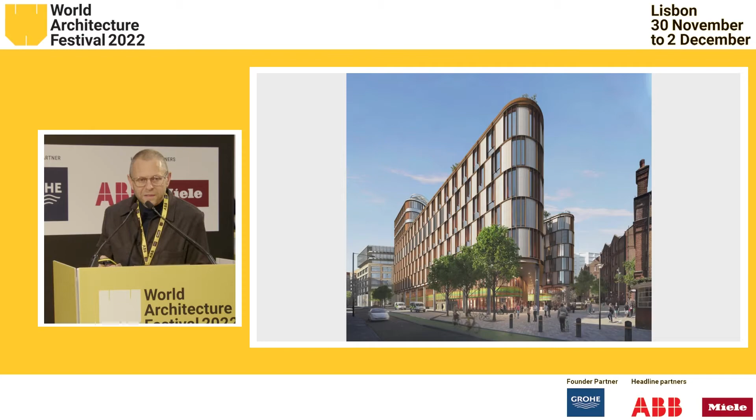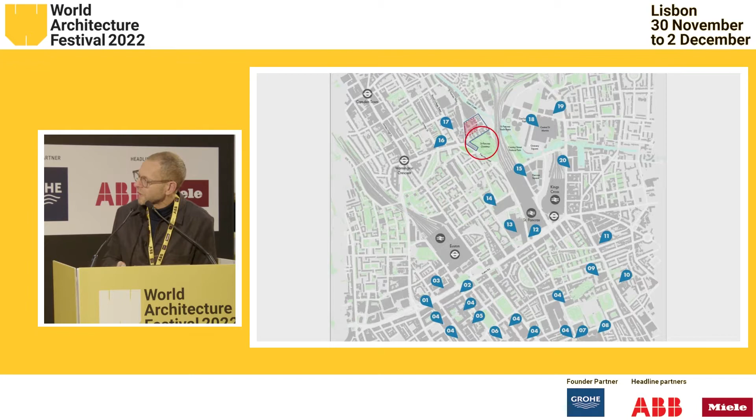The site is in St Pancras, located within the King's Cross Knowledge Quarter, which will enable it to participate with other world-leading institutions, such as the Crick Institute, the Wellcome Trust, and Central St Martin's School of Art. It will also be better connected to the rest of the UK and also to the rest of the world.

The site is set within the historic St Pancras Hospital, still with its original Victorian buildings and completely walled off from its surroundings. And to the south is St Pancras Gardens, a lush place where once stood the 4th century church of St Pancras for 1,000 years, and is currently the resting place of the famous architect Sir John Soane. And you can see by the railways and the canals that it has a rich industrial past.

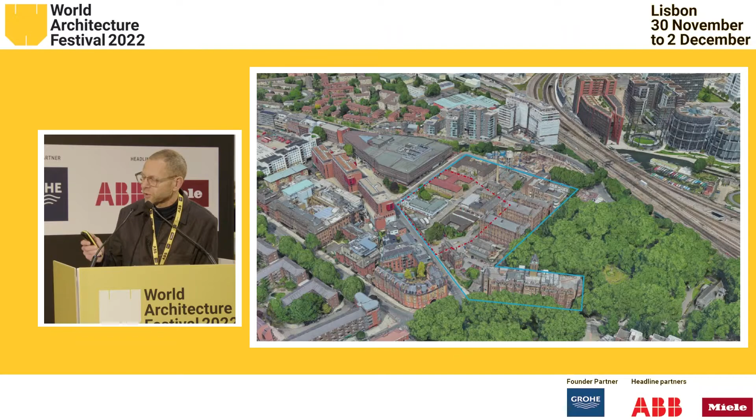Yet the area is changing rapidly, with new developments emerging to the north and to the east.

So what kind of typology could respond to the challenging brief and the rich site? The competition threw up many different ideas, such as the finger, the block, and the campus. Our idea was to create an atrium, inviting in the public realm, which flows through the building and creates maximum connections at the upper levels.

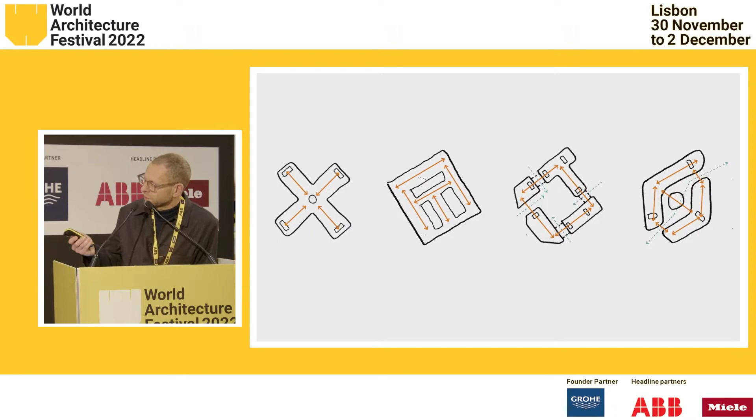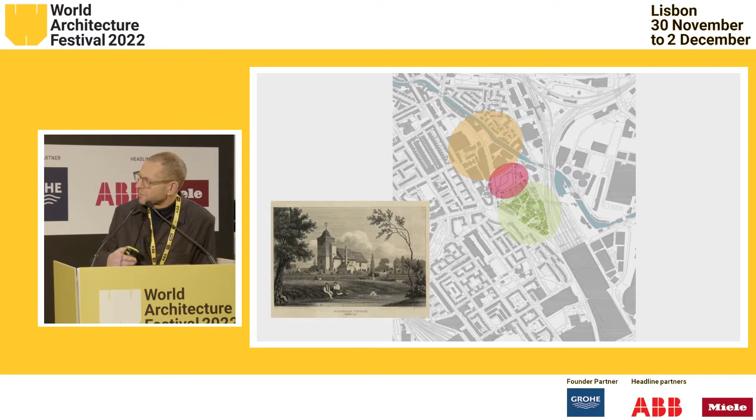Three design drivers inform the design. The first is to create a magnetic new place. Oriel will take its place in the evolving heritage of the site. So drawing on the history whilst looking to the future, it aims to become an urban catalyst and through its architecture, literally create an identifiable and unique neighborhood.

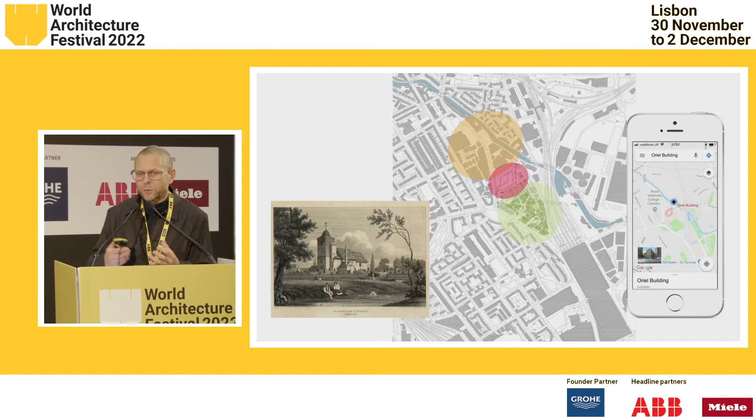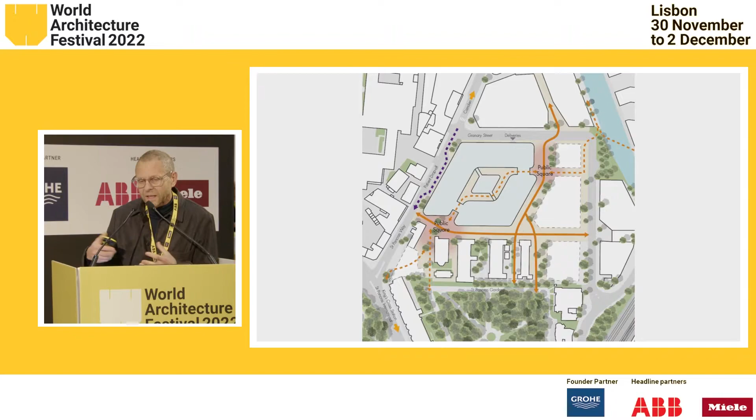So to this end, our urban strategy opens up the site, creating a permeable, accessible, and car-free campus and making better connections through and into the neighborhood. And one of these connections goes through Oriel itself. And two public squares connect people coming from all directions, from the south, from King's Cross, and from the north, and collects people and forms civic settings for our building.

And the public realm flows through the building and connects to the surrounding streets and spaces. And this is activated by retail units and cafes at each entrance, and by conference and education facilities and other public and patient-facing services on the ground and lower ground floor.

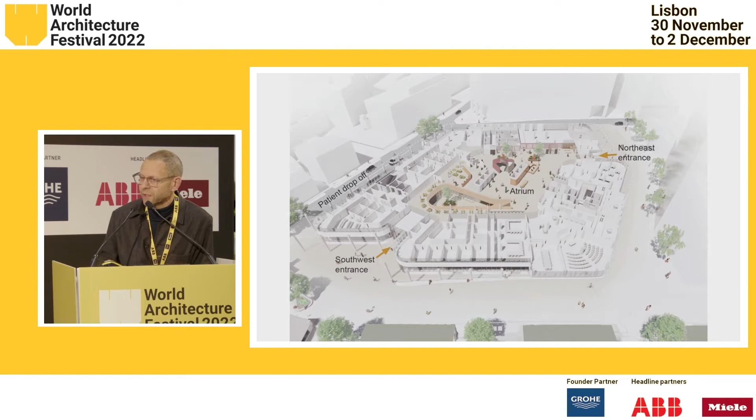And at the heart of the building is this atrium, a generous public space which welcomes everybody. It is here people can come, they can meet, they can hang out, and it also acts as a foyer to the rest of the building.

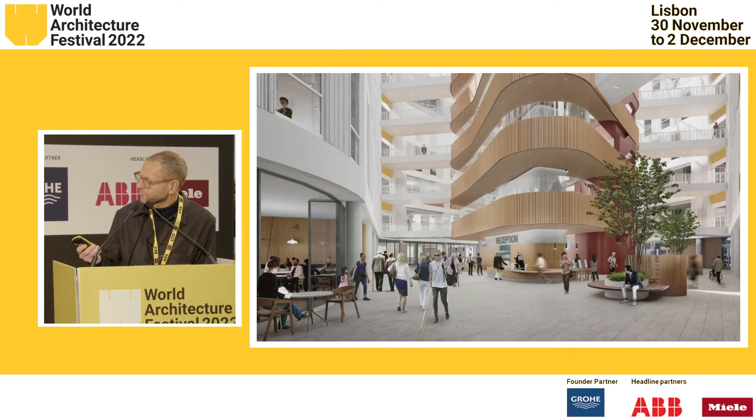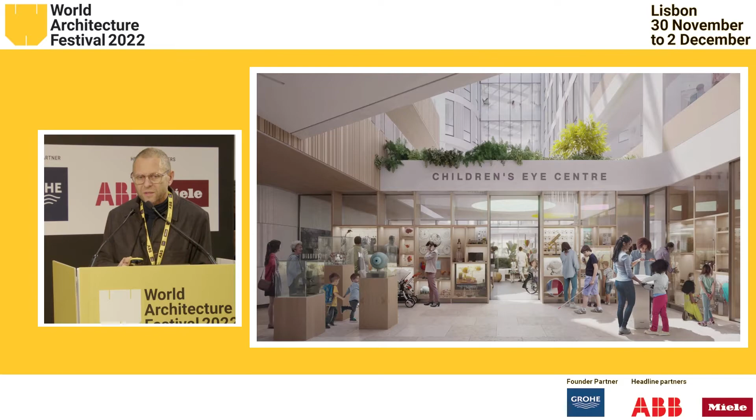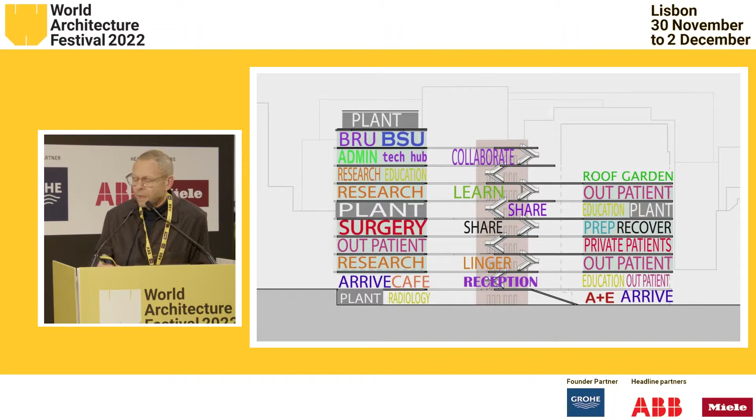The second design driver is that of integration and collaboration. Oriel is all about breaking down silos and creating and promoting cross-disciplinary collaboration. And in particular, it's about creating collaboration between patients and researchers and students and also the clinicians.

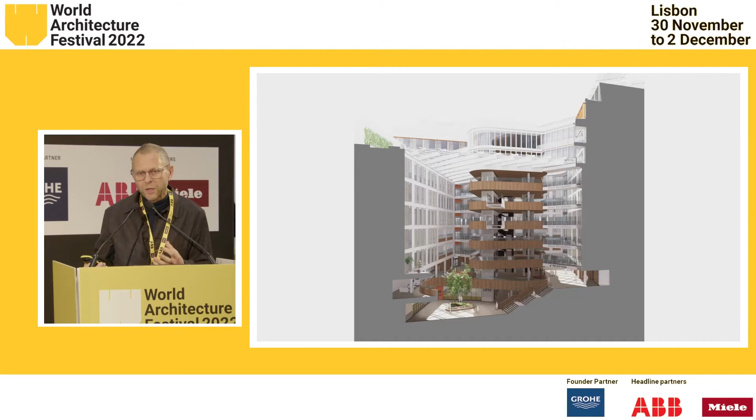And so a structure that we call the Oriel, which is almost like an embodiment of the idea of translational medicine, rises up through the atrium and collects all of the main vertical and horizontal circulation. And we've co-located waiting areas, staff touchdown space, and informal meeting points in order to foster those kind of water cooler moments and serendipitous chance encounters.

The third idea is that of the adaptive building in line with a circular economy. Oriel's brief is highly innovative, embracing the inevitability of change. So the shell and core acts as a flexible rig.

There's a series of generic floor plates that can accommodate a wide range of different uses, from A&E to translational medicine and outpatients, from theatres to labs, and from education to admin and Cat 3 labs on the roof. This flexibility will also allow departments to flex as research priorities and clinical needs change over time.

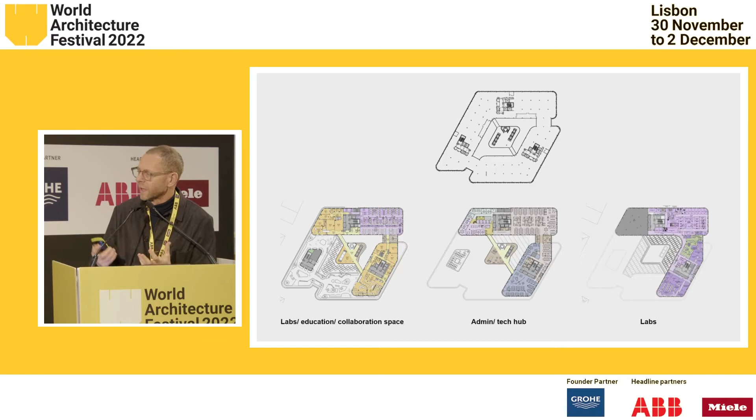During the design process, the flexibility also enabled us to chop and change the different departments. There was continuous moving around of the different departments from floor to floor in order to find the best way of integration and collaboration. We also looked at how this building could accommodate longer-term programmatic changes, should it need to be changed into, say, an office, a student residence, or even a hotel.

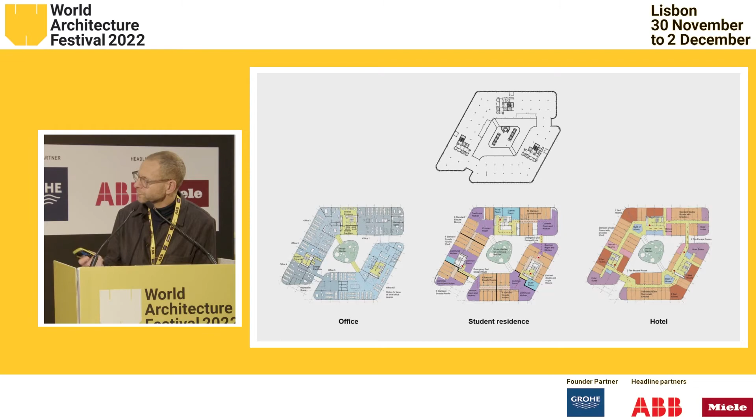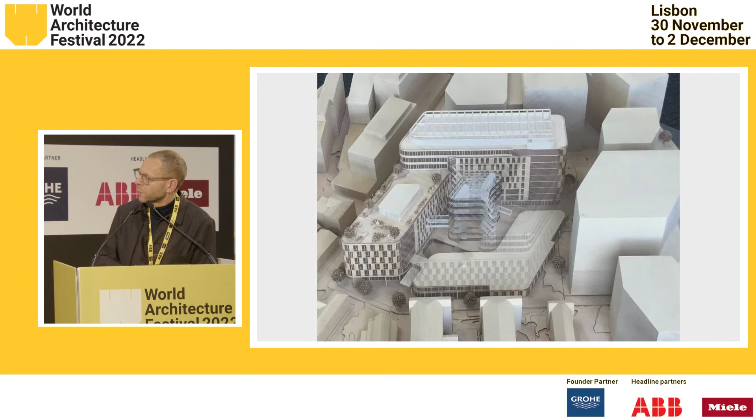In terms of organization, the building is designed as a pair of hands or wings embracing the public realm. These wings rise up either side to create this atrium and are connected by bridges at either end. The Oriel rises up through the atrium, which in turn is topped by a glazed roof, bringing daylight deep into the interior. The massing has been carefully calibrated to respond to the lower scale of the historic city to the south and the emerging scale of new developments to the north.

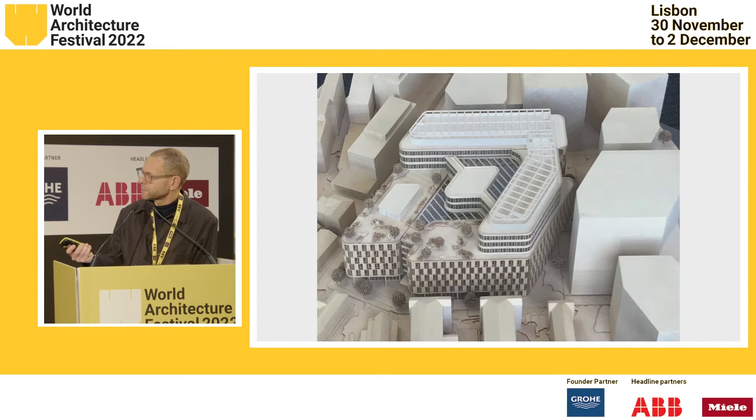And what about the patient experience? At the core of Oriel's objectives is to create the best possible patient experience. This is so critical to improve patient outcomes. Many of these patients are elderly or frail, as well as having visual impairment, but there are many other comorbidities, such as dementia and other neurodiverse conditions.

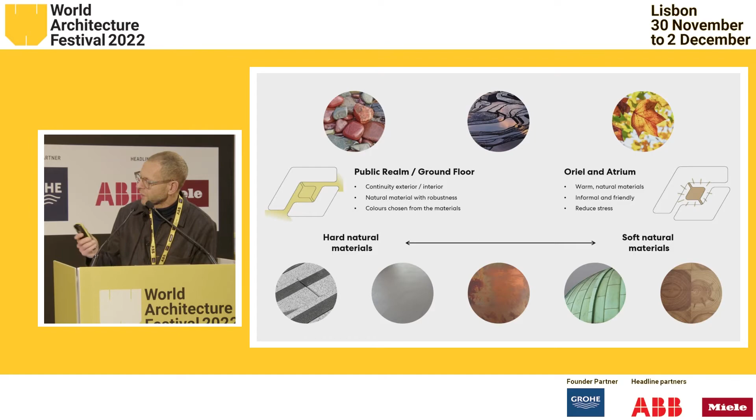So we worked with all of the patient groups and wider organizations to develop a wayfinding, landscape, and interior design strategy that engages with all the senses and creates a completely accessible place. The use of tactile materials and high-contrast surfaces will enable navigation into and around the building, and this will also be supplemented by digital technologies.

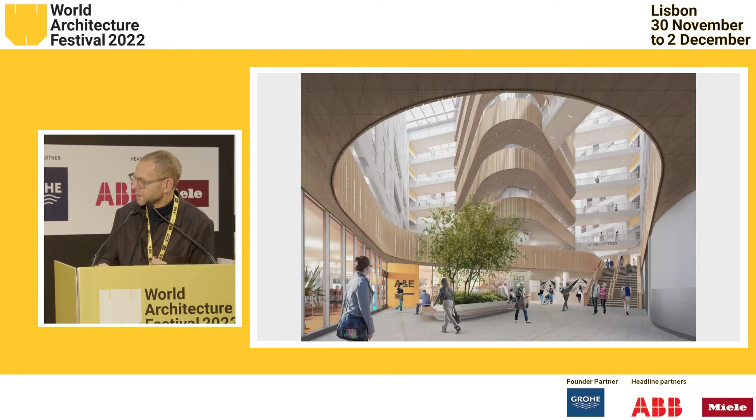This is one of the views at the lower ground floor entrance, and the use of natural materials, plenty of daylighting, biophilia, and places to sit, rest, and meet, we hope will create a healthy and healing environment for everyone.

Oriel is also about creating the best staff experience. It aims to attract and retain the best talent. So there are non-territorial staff areas on every floor at the bridges, and on the 6th floor there's a large collaboration space which opens onto a roof terrace with amazing views over London.

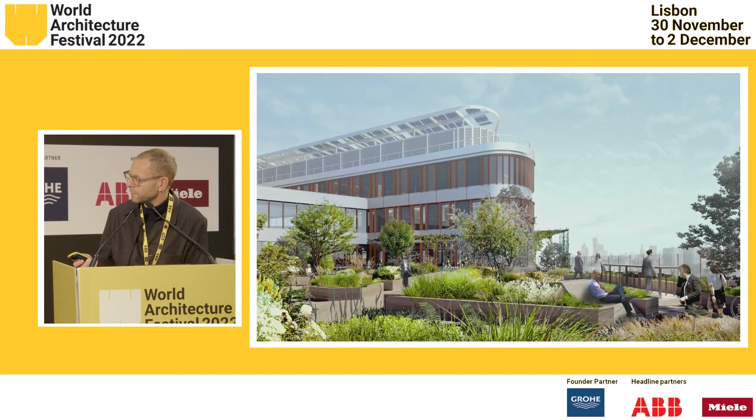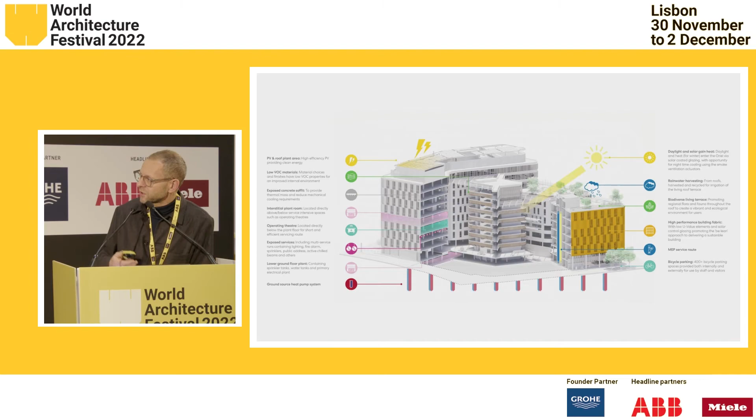Now, buildings such as this, highly serviced with lab and health facilities, consume large amounts of energy, so reducing carbon is a complex challenge. But our passive design measures and fabric-first approach aim to reduce carbon use in the first instance.

The atrium, for example, reduces the surface area to volume ratio whilst bringing daylight deep into the interior. The facade has been optimized for thermal performance, daylighting, and solar control. This is an all-electric building, so that as the grid decarbonizes, so will it. This is a building ready for a post-fossil fuel future.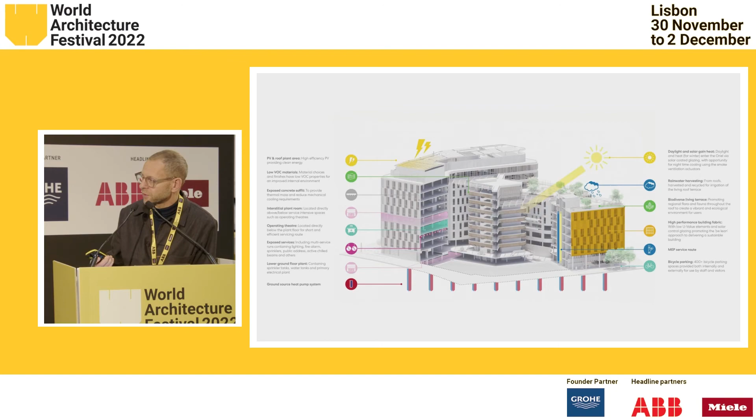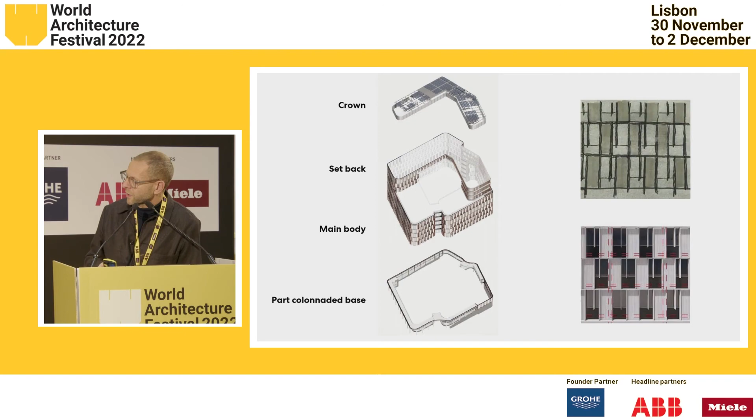And finally, the facade, a key element of the design. Composed of 3 parts, it responds to both the urban and the street scale. Its orthogonal and standardized geometry contrasts with the curvilinear form of the building, and the syncopated rhythm of solid and void creates a playful pattern across its facade.

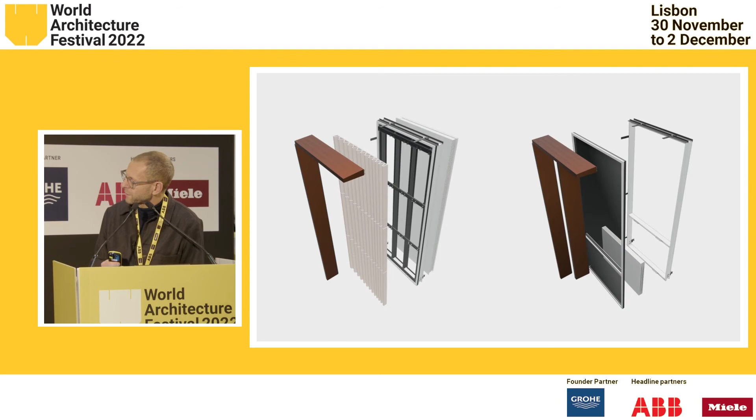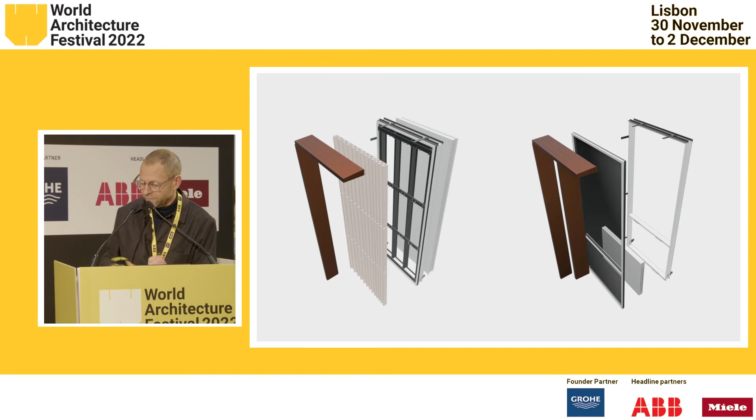And in line with the adaptive building, it's designed as a kit of parts with elements such as louvers and glazing panels that can be changed and replaced as the internal fit-out might change. Sometimes plant might come in where there are consulting rooms, and sometimes labs may change, so the facade can chop and change as the interiors change as well.

This is an image of the various different configurations that can take place. You can see the sculpted ceramic tiling, and the patterning is based on the visible spectrum of electromagnetic waves.

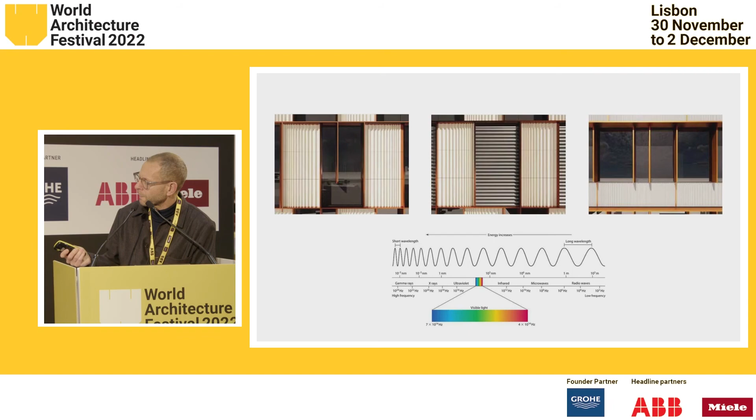The facade is inspired by the Moorfields motto, Fiat Lux, which means let there be light. The modeling will create an ever-changing play of shadows and light during the day. The color and materiality of the bronzed aluminium fins and opalescent ceramic tiles will draw on the heritage of the area, contrasting and complementing the Victorian brickwork and traditional faience detailing.

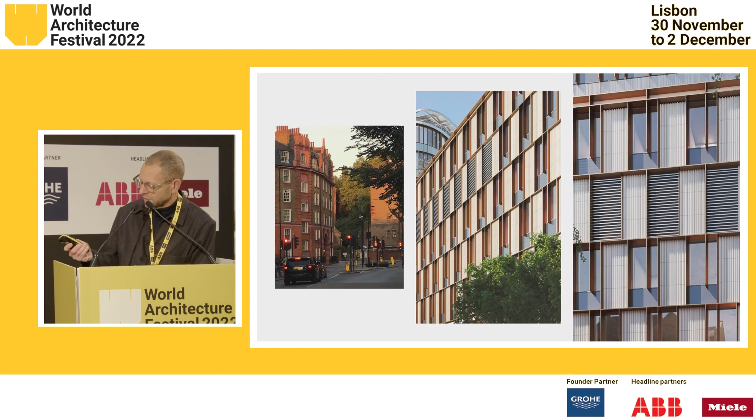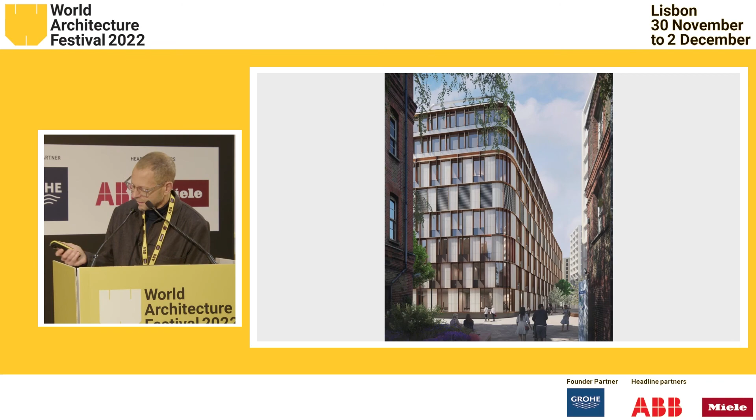So we believe Oriel will be a facility like no other. It is deeply rooted in place, but also a catalyst for change. It will be an environment for innovation to flourish, where the whole community of those involved in eye care—the scientists, the clinicians, the students, and the patients—will be involved in developing new eye care and treatments.

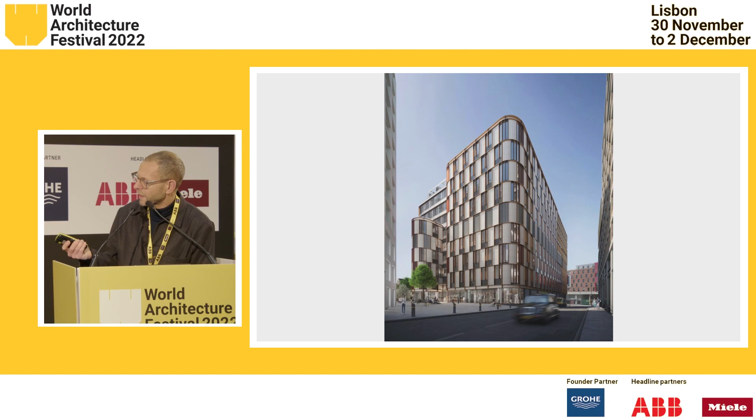And we hope that in the future, children like Rhiannon will come to Oriel, not only to be treated with the latest in eye care treatments, but to be inspired and energized to participate in the evolving story of health and science. Thank you.